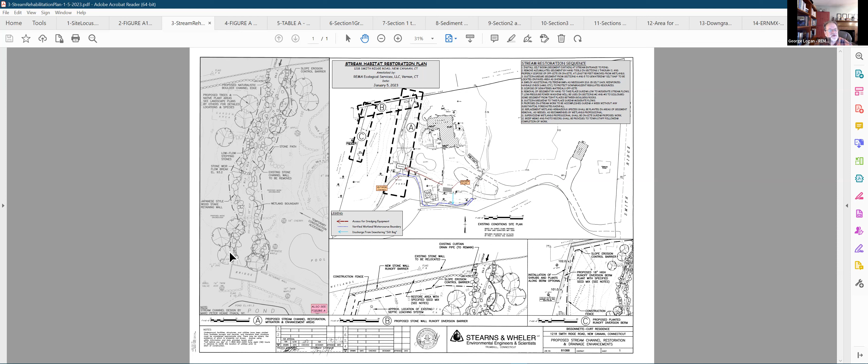I will come back to this, but I wanted to show you that next I'll go into more detail, which shows you, again, this is the top of it. I zoomed it out a little so we can all see it. There were 5 sections that were pretty obvious and distinct, and that was actually the way the original enhancement was done. So 5 sections, each one a little different in character.

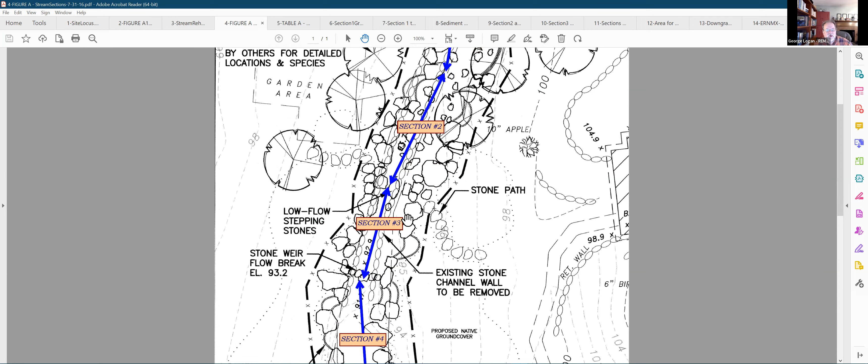We tied our inventory of what has happened to the stream over the intervening years. Most recently, as you've probably seen in the record, there's been an increase of some sediment that has come into this 156 feet. Here's section 1, 2 - I'll describe those more - 3, 4, and 5. And here's the bridge that some of us stood on last week and looked up from.

One of the reasons for doing this is that there has been a deposition of sediment - sand, coarse material, and some silts - within the watercourse, which has basically smothered the habitat and resulted in a diminution of its quality as an aquatic habitat.

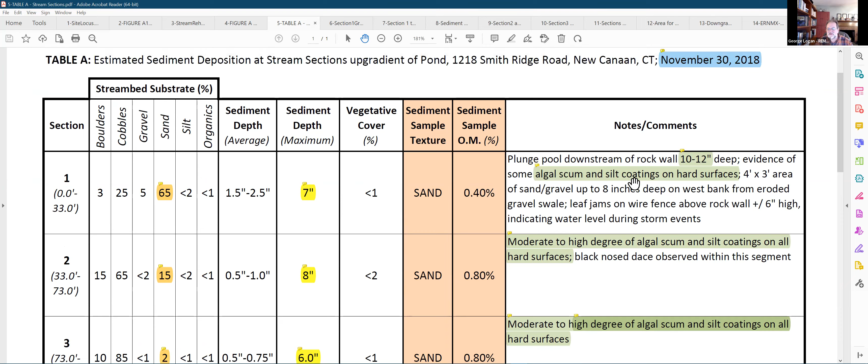Back in July 2016, and again, as this table shows, on November 30th of 2018, we came through and looked very carefully at each of the sections, inventoried and catalogued the conditions within each one. We even took sediment samples and sent them to the UConn soil laboratory - we were interested in what the sediment sample texture would turn out to be, and we also looked at organic matter.

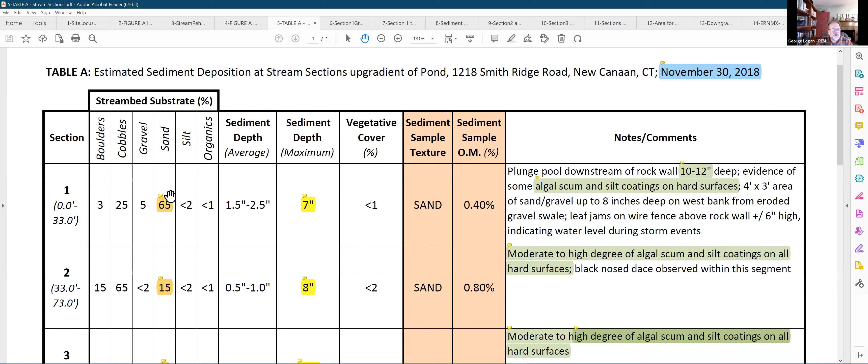So here, what I've done particularly is highlight the stream bed substrate in the sand category in the column. You see section 1 has 65% of the substrate as sand as of 2018. By the way, I should mention I went back and did an inventory in July 2022 of these 5 sections.

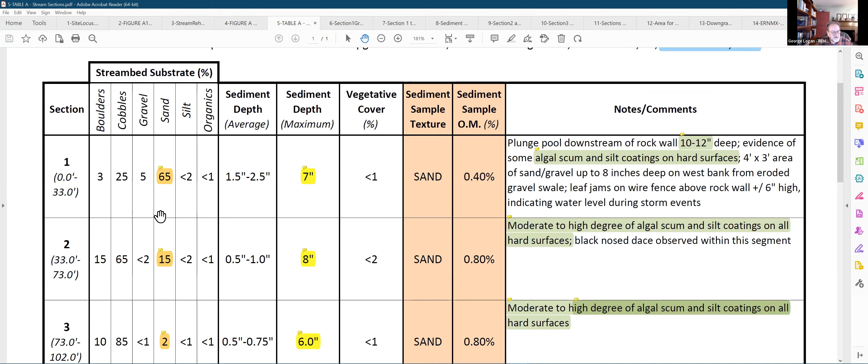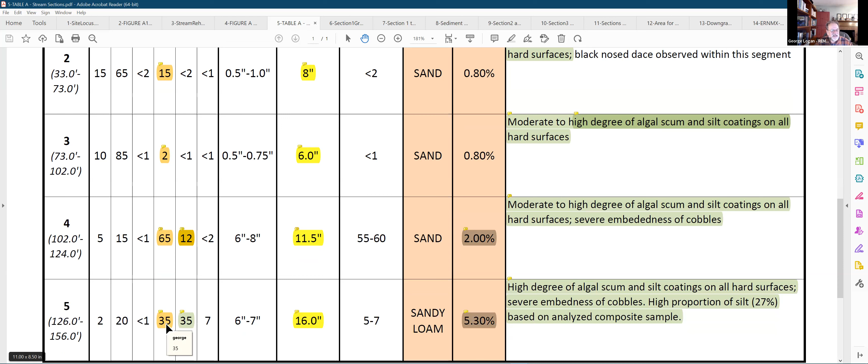I found that the conditions are pretty much the same - not much difference. The stream has sort of equalized, reached an equilibrium, and the sediment deposits have really not moved since '18. Section 2 is 15%. Section 3, not much - I'll explain why. And as you can see, sections 4 and 5 have significant portions of sand within the brook.

What's also interesting is the component of silt, which you wouldn't be surprised to find in the last segment, which is also a little deeper - about 35% silt. Also, the organics are higher, at 5.3%. The reason is that sections 4 and 5 are the deeper sections of this watercourse habitat, and that's where a lot of this accumulation has taken place.

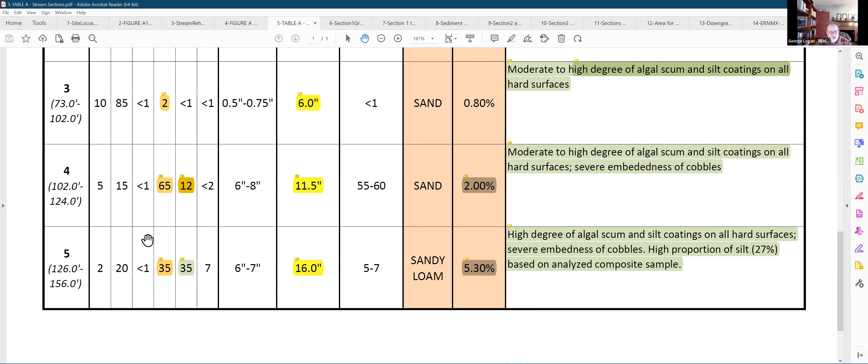That's the area we will talk about where the suction vacuuming is going to be employed. Another thing I need to mention is here's the sediment depth averages across the entire section, but I've highlighted the sediment depth maximum - you can see 7 and 8 inches maximum, and 1 and 2.

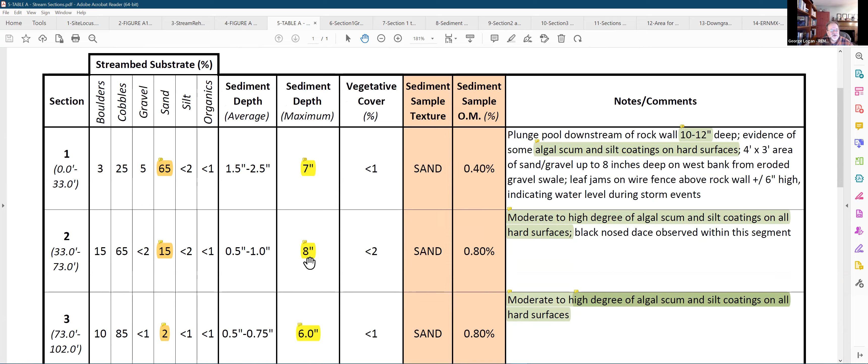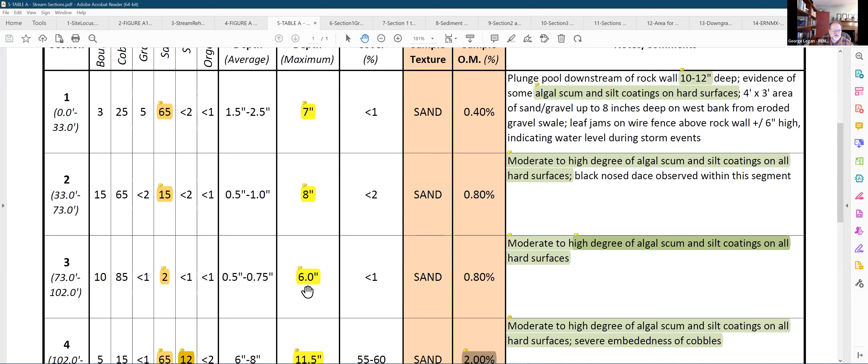These are basically sand deposits that have been deposited here. Section 3, even though the average is pretty low - and I'll explain why - there are still some areas at the edges of section 3 which have a 6 inch maximum. Actually, as you'll see, in 2022 I noticed it was actually up a little bit.

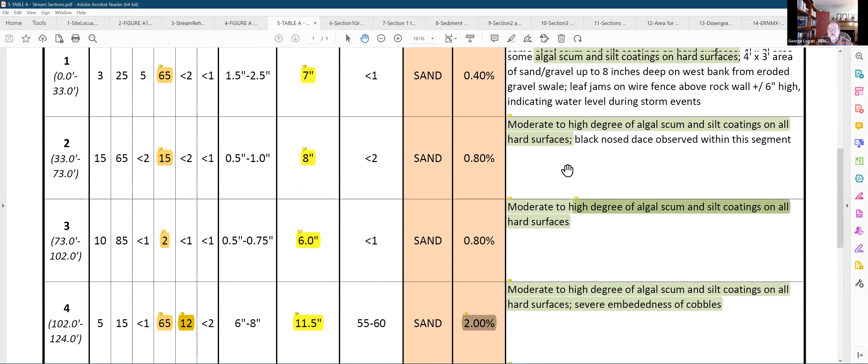The other thing I showed here in the right column is that one of the things that has happened as a result of this sedimentation of silt and sand is that a lot of the silt has moved through and either been deposited in sections 4 and 5, or actually gone into the pond itself. But we're not requesting anything to be done at the pond at this time.

What I noted here is that there was algal scum and silt coatings on hard surfaces. As you've probably heard from others in my profession, when you get these silt coatings on hard surfaces and algal scum - because it acts like a fertilizer - combined with sun exposure, you basically compromise the hard habitat and the aquatic habitat that the benthic organisms use.

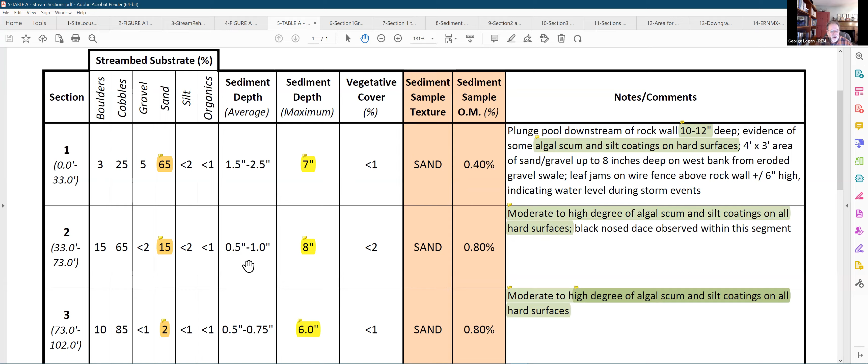And there are benthic organisms that we have found within this segment, but obviously it has been compromised since the sedimentation has taken place. George, may I just ask you to define what benthic organisms are?

So as you probably have heard, benthic organisms are the larval forms of aquatic insects. The eggs are deposited by the adults that are on wing most often, and then the larvae will spend their first instars, or the first few months, sometimes a little more than a year, within the aquatic environment. Then they emerge as flying insects - for instance, mayflies, stoneflies, caddisflies, true flies, and the like.

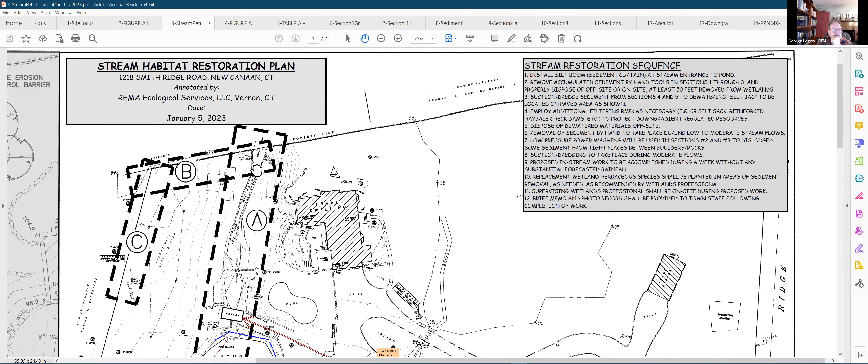Now, as you can see, this doesn't show, it doesn't look too much like this, because this is what was being proposed back in 2006, whereas this is what existed there before, which was just a straight channel, a very uninteresting habitat entrained in narrow walls. And this was completely revamped.

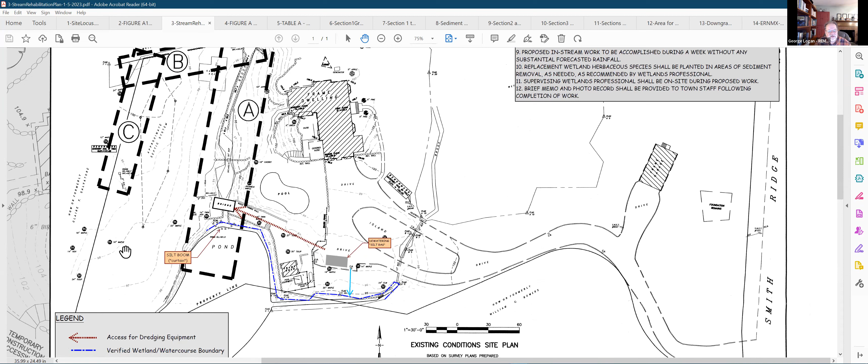But this is the map that we have. So I just wanted to show you some of the access for the equipment and where the equipment will be sited and what we're actually doing. And all this is spelled out in sequence in this stream restoration sequence, though I'm not going to read it all.

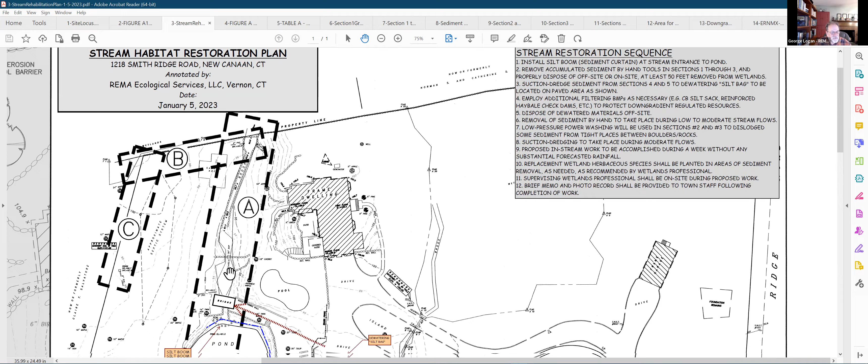All right, sections 1, 2, and 3, which are from here to there, as you recall, what we're proposing is to use hand tools. So myself as a supervisor and my people that will be helping me are going to go in there, and we're going to basically remove the sediment deposits by hand, shovels, and then burlap bags with handles, and then we'll be taking them out - and I'll show you where we're going to take them out.

But before that is even done, one of the primary things that has to happen, because the minute we start working in the watercourse itself and taking out sediment, there's going to be some slurry, some of the fines that are within even those sediment deposits that are mostly sandy. We don't want them to reach the pond.

So we're going to have a silt boom that's going to be employed, typically what you call a turbidity curtain sometimes, or a silt boom, at the entrance to the pond, so that it will not allow any fines, which are the ones we're most concerned about, to enter the pond. And that's going to be tied into the banks of the pond on both sides.

The silt boom is not the blue line, by the way - it's more the gray line. So it's going to be a semi-crescent, if you will. So that's what's going to be happening in sections 1, 2, and 3.

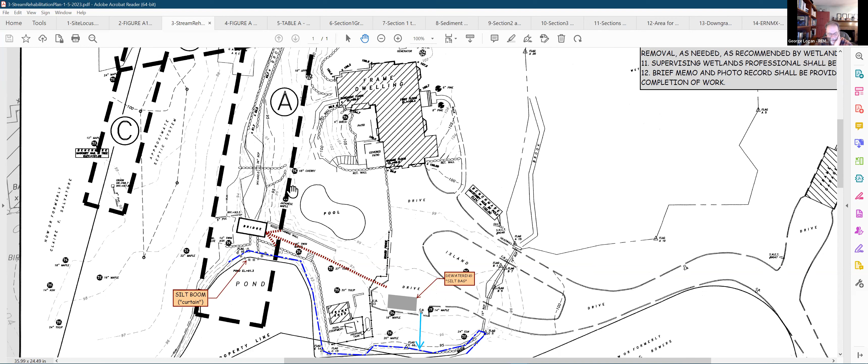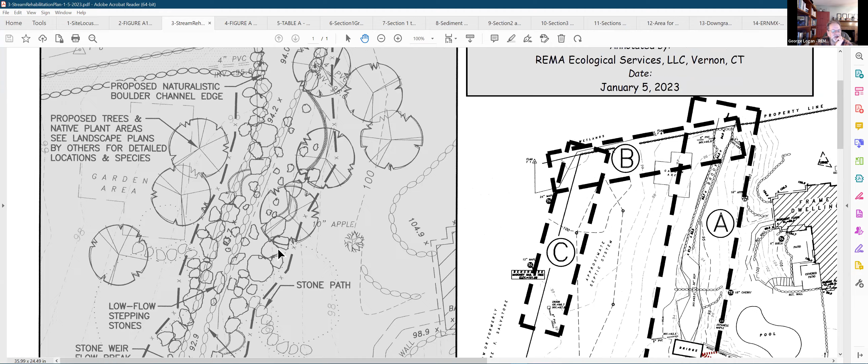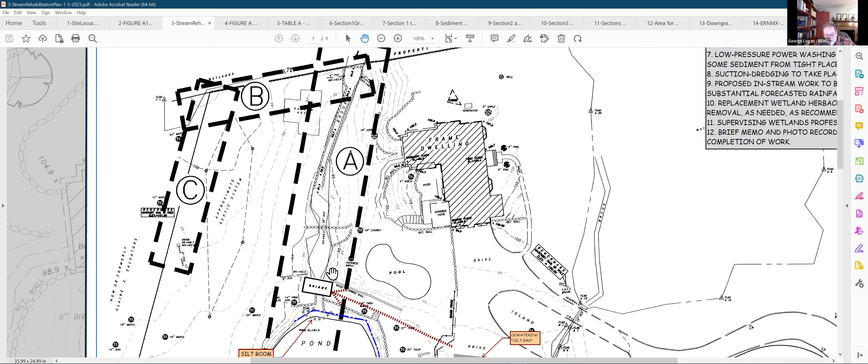One last thing before opening it to questions: we did consider alternatives. The alternatives consisted of doing nothing, so there'd be no restoration involved, or just dealing with the sediment deposits in section 1 and section 5, the last one just before the pond. But we thought it would be best, if we're going to expend the effort, to do a proper job and have the best benefit for the aquatic community by restoring the entire stream section, all 156 feet.

And Janet, have I forgotten something? Nope, you've got everything. Okay, I'm happy about that. Thank you.

Well, thank you very much, Mr. Logan. Is this a good time to take some questions? Yes, please, of course. So do we have some questions for Mr. Logan and Attorney Brooks?

This is Commissioner Brunelli. It appears on segment A of the map, proposed stream channel restoration, mitigation, and enhancement areas, that it says the existing stone channel wall is to be removed. Is that being planned at this time, or was that work done previously? That's correct on the map. This is basically what's there now. I wouldn't call it an as-built, but it's pretty darn close, so this is what was proposed before. We're doing no removal of any of the hard substrate. All we're doing is removing the sediment that has been deposited. Okay, thank you for the clarification.

You're welcome. George Perkins, for the record, what type of aquatic life is there, and is there any danger of them being destroyed through vacuuming? Most of the macroinvertebrates that we found, not in great abundance, were in sections 1, 2, and 3, particularly sections 2 and 3, and those are the ones you'd typically find associated with hard habitat, hardscape habitat. There are some fish too, we did see some minnows, and in table A you saw we had some dace. Obviously those will get out of harm's way by swimming. There probably will be a little bit of a take for the aquatic organisms, but this is a small area, so what happens usually is they repopulate the area pretty quickly from the upstream portion, and that will happen probably within one season.

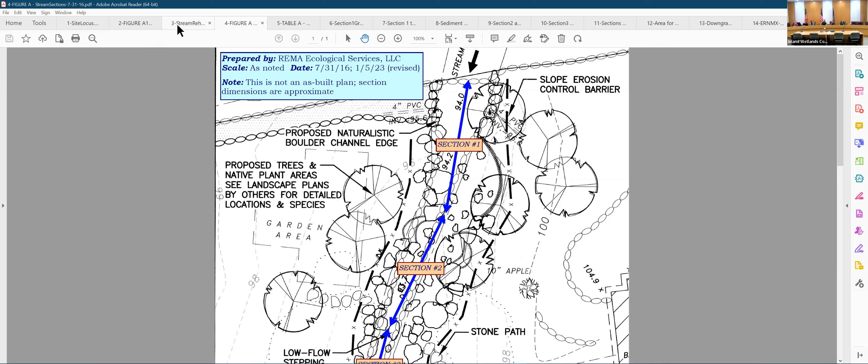Thank you. You're welcome. This is Commissioner Jameson. I'd like to go back to the buildup of the sandy and silty sediment. You mentioned this typically occurs naturally, so I'm interested in why you think there's been this significant buildup, and whether there's anything planned that will prevent it or slow it down in what you're proposing.

What has happened here is an accelerated accretion of sediment because of activities within the watershed in the past few years. If those activities hadn't happened, this accumulation would have probably taken another decade or two. So it's really compromised the habitat so that the stream itself can't clean itself out, because when the big slug of sediment came, it was so significant that it went from channel bank to channel bank and filled the lower areas like section 1, and then section 4 and 5. Thank you. So what is likely to have caused this accelerated consolidation of sediment? Development within the watershed. Okay.

And how long do you think the work you're proposing is going to last before you get more buildup? Well, hopefully — looking at the watershed correctly, it looks like there's not a tremendous amount of opportunity for additional development, maybe some, but not any large amounts. Once this is done, which by the way should take us about a week, it's not a tremendous amount of work, it should last for many decades.

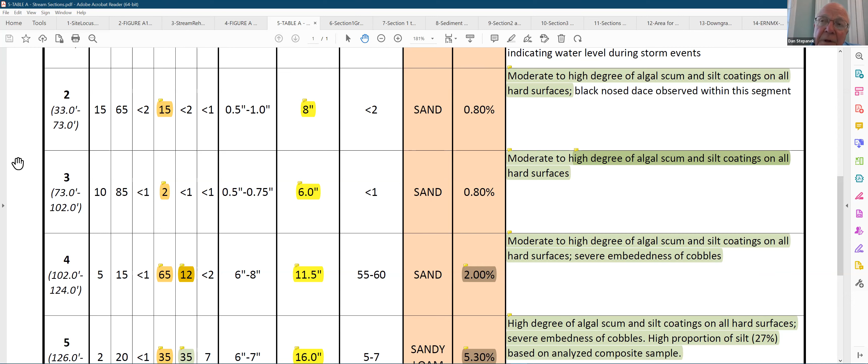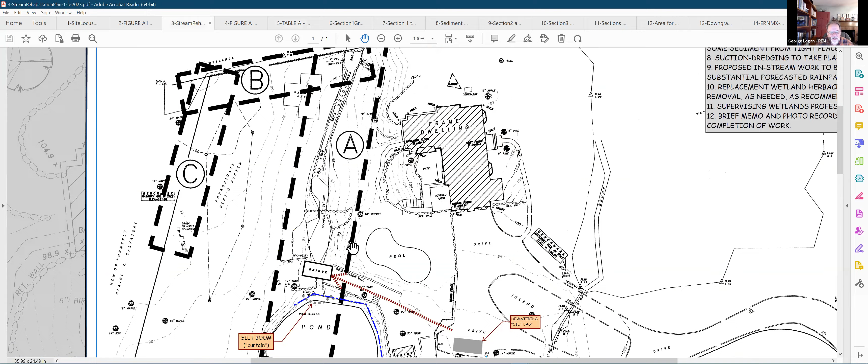Well, what's downstream from the piece you're talking about? It's a man-made pond, which is in part on our property. Let me show it to you again. Here is the property boundary, as you can see. Part of the pond is within 1218, and some of the pond is on the next property over. These two properties were kind of connected, I think they were relatives. The pond, when it was created, was done on a single property. Further down, let's see what I can show you.

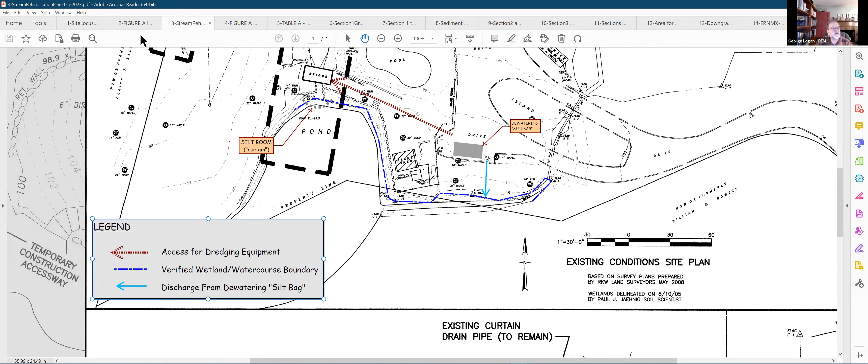Further down, it's just a wooded area with a stream that goes right through it, as you can see here. So there's the kidney-shaped pond that's entirely within the two properties, our property and the neighboring property immediately to the south. And of course, it has a little dam and a cascade down into the perennial watercourse.

This is Janet Brooks for the record. In conjunction and during the planning phase of this project, the clients also utilized an engineering firm that looked at the pond to assess whether it would be wise to address any sediment buildup there. Actually, the engineers suggested that the buildup apparently was happening earlier in the stream and not so much in the pond, and didn't recommend any remediation at this time in the pond.

Hi, Beth Sanford for the record. Just curious, in terms of the 200 plugs that you're going to plant, are they all natives? Absolutely, yeah. They're natives, and they're the kinds of species you would expect in a similar riparian habitat.

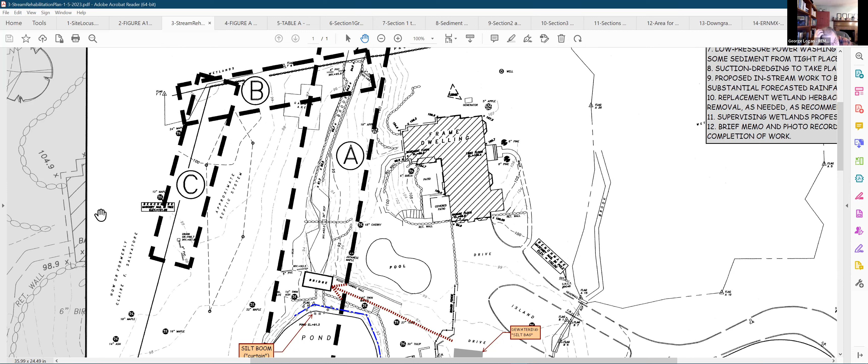I have one last question. There is one additional project taking place north of where you're going to be implementing your work, should you get a successful review this evening. Do you have any considerations or concerns about perhaps waiting to do your work until the other work is resolved? I know there's some challenges with that, but I just wanted to throw it out there as a conversation.

May I respond, George, and then you can add in. Ideally, this entire work - the joint application with Grace Farms and our individual project - would be done 1, 2, in the order we came to the commission. The joint application along the inner fence swale, and then in case that sends anything into the stream, we would do that remediation work.

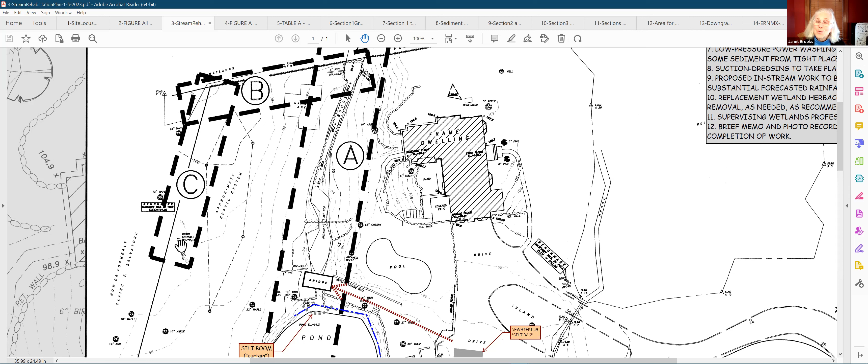For reasons unrelated to the erosion control in that joint application, the Army Corps is having problems proceeding due to interagency disputes unrelated to the swale issue, having to do with wildlife they're locating in the state of New York. So we don't know if we're going to lose an entire year, which we may, on our joint application. We're not sure we'd like to wait an entire year, because that also means the planting plan on the stream is delayed that much further.

So George, if you have something else you'd like to say. That's pretty much it. Ideally we want to do 1, 2 - do the swale, and then right after that, do the stream.

Well, I understand that's a challenge with waiting on closing the loop with whatever they have going on with the Army Corps. Just be aware that permits issued in New Canaan are good for 5 years. So if you decided to wait, you do have that option, depending on the other matter being resolved and hopefully implemented. So just something to take into consideration when you're planning the strategy for the work you'll be doing as well.

Thank you. Do we have other questions from the commission or from the Director of Wetlands? No. Anybody feel there need to be special conditions attached here?

Well, I just have a few comments regarding the application. Both Janet and George have been working with me on this, and we started the discussions a few months ago and went through our wetland checklist very comprehensively. They've pulled together a very comprehensive plan indicating all of the sediment that needs to be removed, broken down section by section. I think that came across clearly to the commission members this evening.

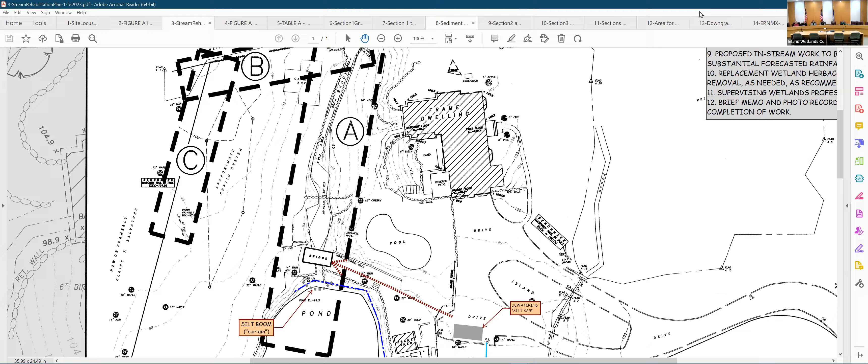All those in favor, please raise your hand. Thank you. Any abstentions? Any votes against? No. So the application, with the special condition that upon completion of planting and seeding there's a final review and report submitted to the Director of Inland Wetlands, has been approved. Thank you very much for a very good presentation.

Thank you, much appreciated, thank you very much. Happy spring officially - yeah, first day of spring. Okay, perfect timing. Thank you both, I appreciate your time. Thank you. Take care, everyone.

So now we move on, this is Angela Jameson for the record, to item 7, application number 22-23-24, 67 Carter Street, Estate of Hartwell C. Self. As you can see from the agenda, this is a request to change the Inland Wetlands and Watercourses Map of New Canaan. This item has been tabled until our meeting on April 10th so that we can hold a public hearing on this matter, as required when changes are proposed to the map. Kathleen, is there anything you'd like to add to that?